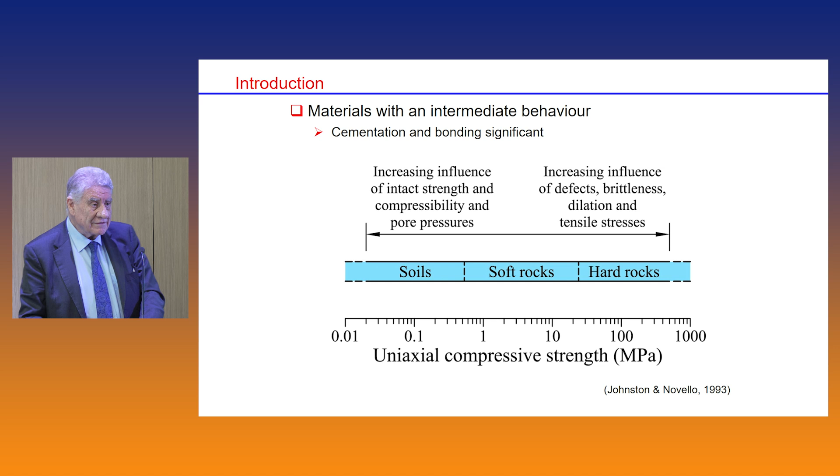Of course, argillaceous materials, rocks made of plastic clays or indurated mud rocks, have been intensely studied in recent decades, mainly because of interest as a possible host medium for deep disposal of high-level radioactive waste, because they have low permeability, significant retardation properties, not much economic value except in special cases, and some sealing capacity. Of course, they are weak rocks, so they require support in excavations. They are more sensitive to chemical changes, and if there is an increase of temperature, overpressures are generated, as we'll see later in this lecture.

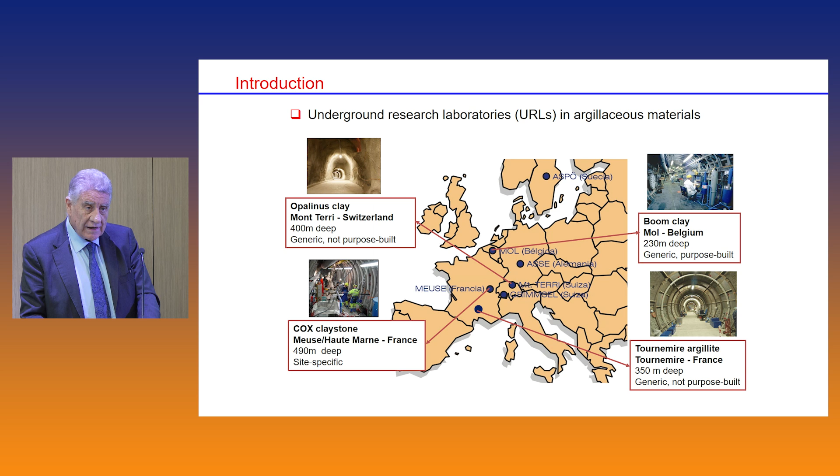Because of this interest, there have been a number of underground labs where excellent research has been done, four of them in Europe: the Opalinus clay in Mont Terri, Switzerland; the Boom clay in Mol, Belgium; the Bure underground lab in Cox Claystone; and the Tournemire lab, among others. Reading for these lectures on this subject, I've collected quite a number of clays that have been intensely studied.

I put them in a geological column. They actually span the full geological column, and I stop at the beginning of the Mesozoic. I also highlighted in blue some of the materials that we will give prominence to in this lecture.

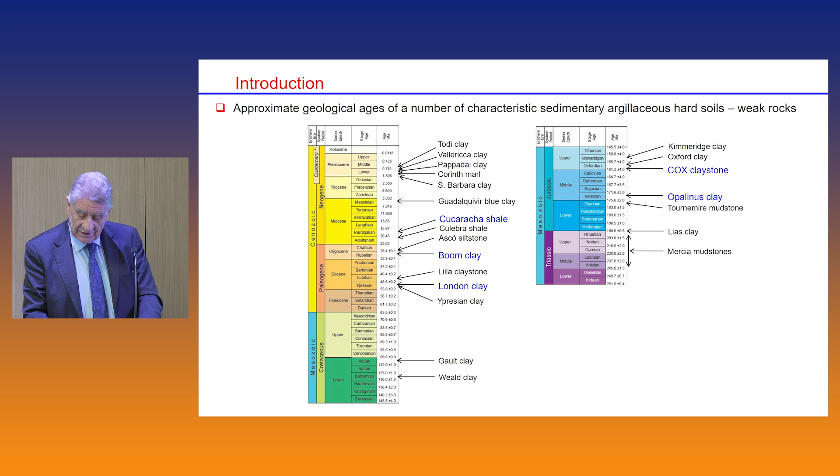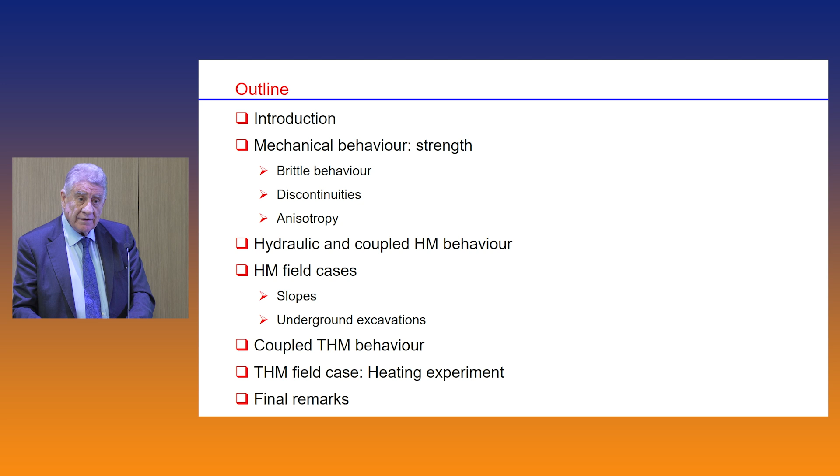After this introduction, we can look at the outline of the lecture. I'm going to talk about mechanical behavior, focusing only on strength, on phenomena like brittleness and anisotropy. A brief mention of hydraulic and coupled hydromechanical behavior, and some field cases regarding either slopes or underground excavations. Then towards the end of the lecture we'll introduce temperature briefly, focusing on one aspect: the overpressures generated by thermal effects in these materials.

So let's start with strength. These materials tend to fail in a brittle manner. I define brittleness as: when we go to the peak, after the peak there is a significant loss of strength. This is a ring shear test on a Spanish clay we studied some time ago, and we can see that as we continue shearing or displacing one piece of the clay over the other, we reach a final minimal and stable strength, which we call residual strength, and that strength can actually be quite low.

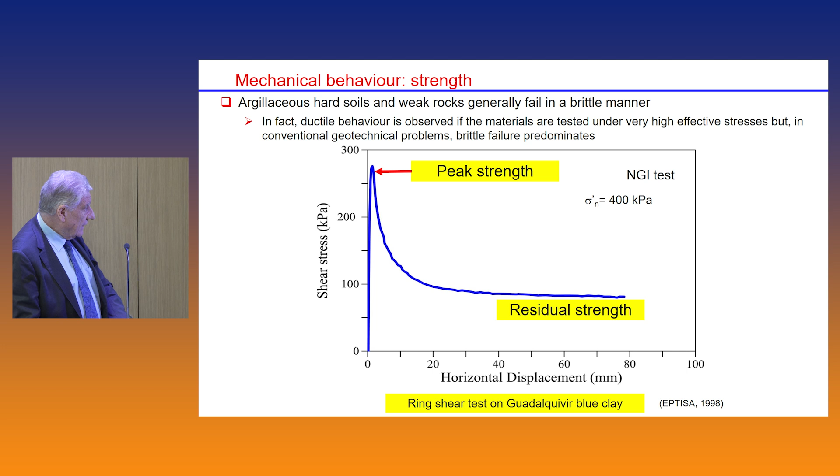But the interesting point is that when we look at the clay in those shear zones, in these localized zones, we find that the clay particles have actually oriented themselves in the direction of the shear displacement. And that explains these very low values of strength, because what we are measuring are frictions between clay minerals.

And this is a typical result. Here we have clay fraction, and here friction coefficient. We see that when the clay fraction is small, the peak and residual strength are actually very similar. They are ductile, because the coarse particles which are in there actually disturb the clay fabric, and they don't allow the clay to align itself and form these very oriented sliding surfaces.

But as the clay fraction increases, we can see that obviously the peak strength reduces, but the residual reduces even more, the distance increases, and brittleness increases, because there is enough clay that this oriented fabric can form and provide this low residual strength. And we obtain that all the time.

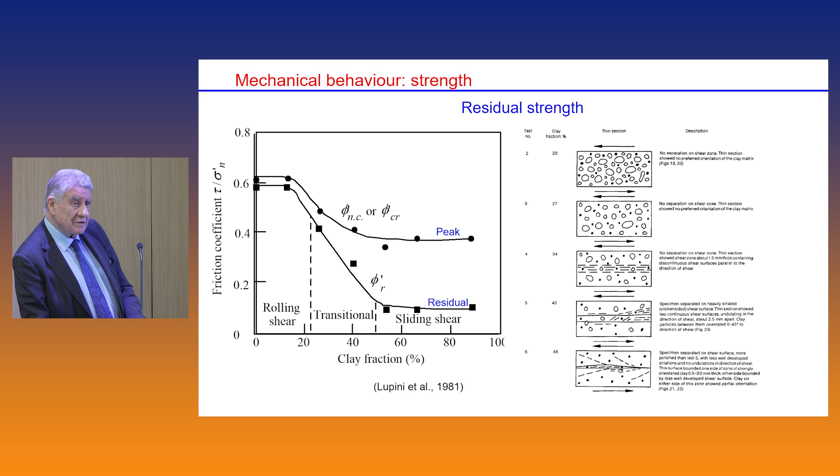These were artificial materials, from a classical paper back in 1981, but more recently, for instance in Opalinus clay, the material in the Mont Terri lab, there are facies which are more clayey, others which are more sandy, so you end up with samples with different amounts of clay. And we obtain the same picture of results.

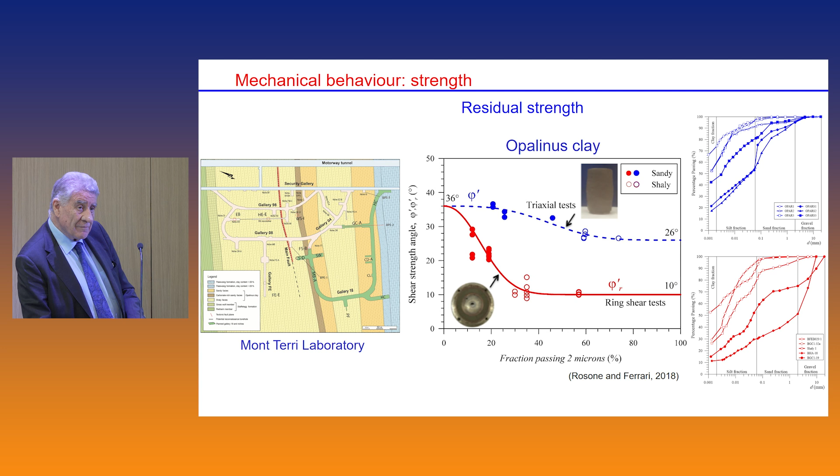This is the peak coming from triaxial test, this is the residual coming from ring shear. This comes from some results from Alessio Ferrari and co-workers, and we can see that we get the same pattern, a large difference, large brittleness, as the clay fraction increases.

To illustrate the really deleterious effects of residual strength, we can just show an example which is the Panama Canal, which actually goes mainly north-south. South is Pacific, north is the Atlantic.

In fact, it was initially a French initiative, which was defeated mainly by yellow fever and health problems. Then at the beginning of the 20th century the US took over. They managed to control the yellow fever, medicine had advanced, and they also abandoned the idea of the sea level canal to make things easier.

And in spite of all that, there were major landslides that we are going to have a look at now. It was opened in 1914, but even so, the major landslides have continued. The last big one was in 1986, which has led to the canal being shut down on at least 26 occasions totally, and other times partially.

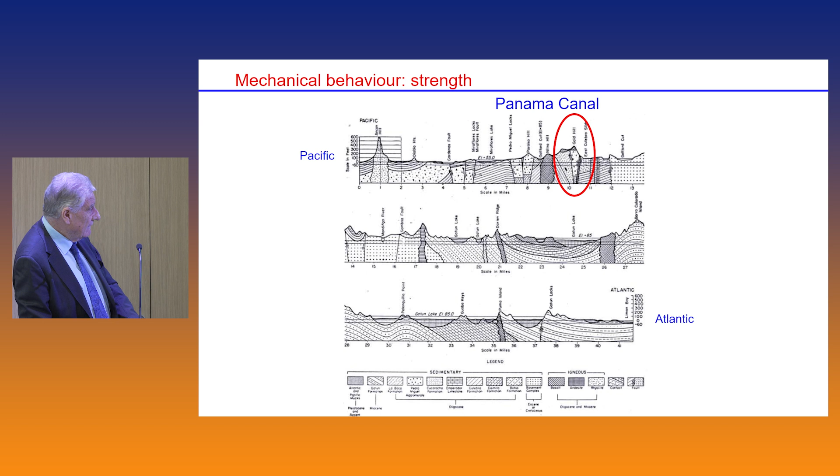You can see here a rare photograph from the Lesseps initiative, in the continental divide, with rather steep slopes. This is the continuation by the US, still rather steep slopes.

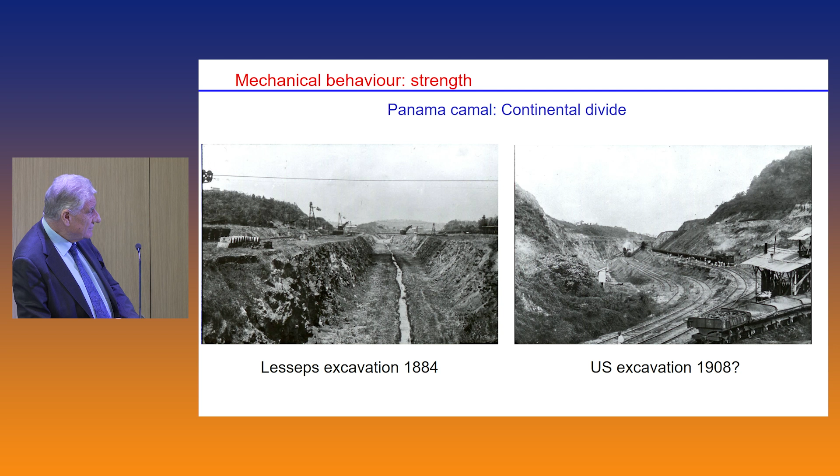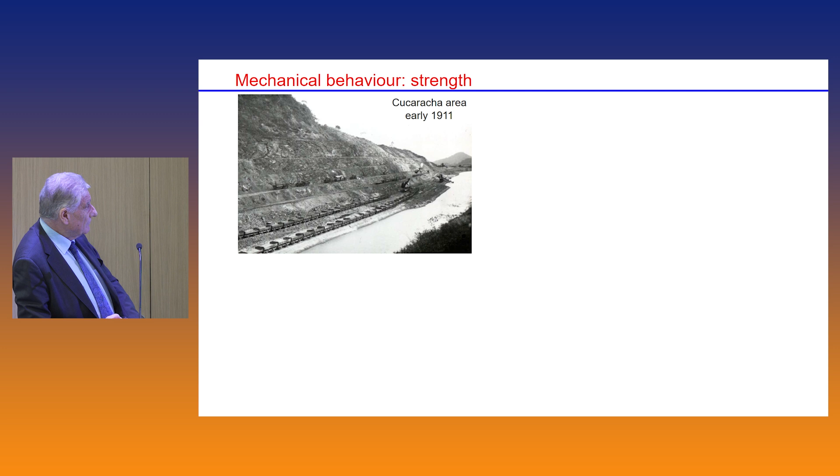Things were going well, but at the end of 1910, and especially from 1911 on, the major landslides started. This is the Cucaracha slide of early 1911, another one in September. There were many - another one in the West Culebra location in 1912, so much so that they ended up flooding the canal and removing material by dredging, because it was more efficient than by terrestrial means and so on.

There were three main areas of failure, all under very similar circumstances: Culebra, West Culebra, and Cucaracha. These are two hills which remain more or less intact.

It was opened, as I said, in 1914, just in time for the First World War, but the slides continued. This is one in 1915. This thing here is the toe of the slide that has appeared in the middle of the canal, so it was coming up here. And that was the last big one, in 1986.

The canal partially open, but quite a lot of dredging going on. There is still dredging going on at present.

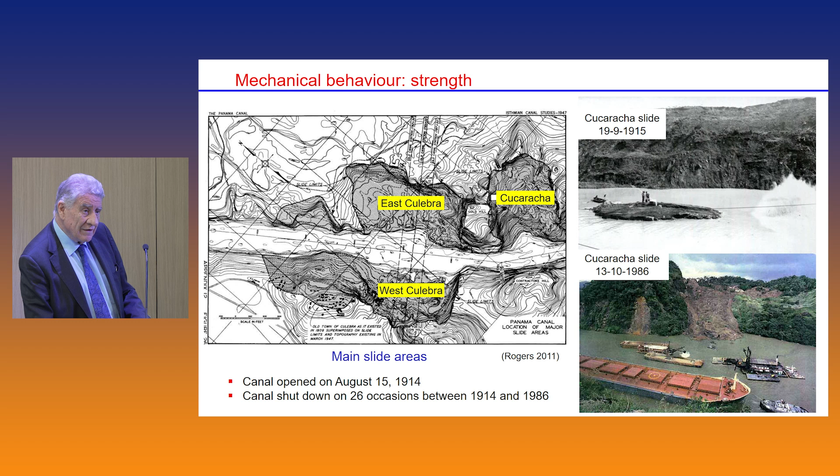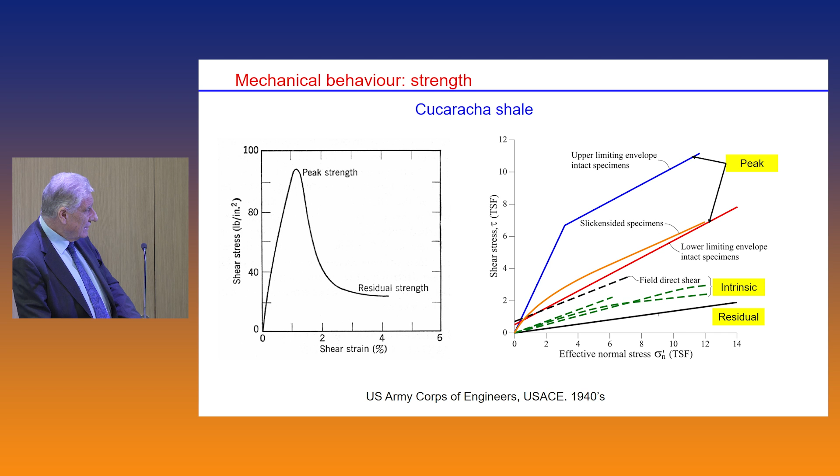And to show the reason, obviously, the culprit was the Cucaracha Shale, which has the classical brittle behavior. This is the peak strength, quite a range because it's natural material.

This is the residual. Now here, in fact, there is also a range of residual, but the average, which I think is a bit low, but it's certainly 7.5 degrees. Perhaps in reality it's a bit larger, but certainly not much larger.

So that's the reason. And just to show the effects of residual strength, this is in red, the design excavation as it was and how it was progressing. But from 1911 on, we had landslides, and in 1969, the surface, which was original there, it's come down to this. It's adapting to the residual strength.

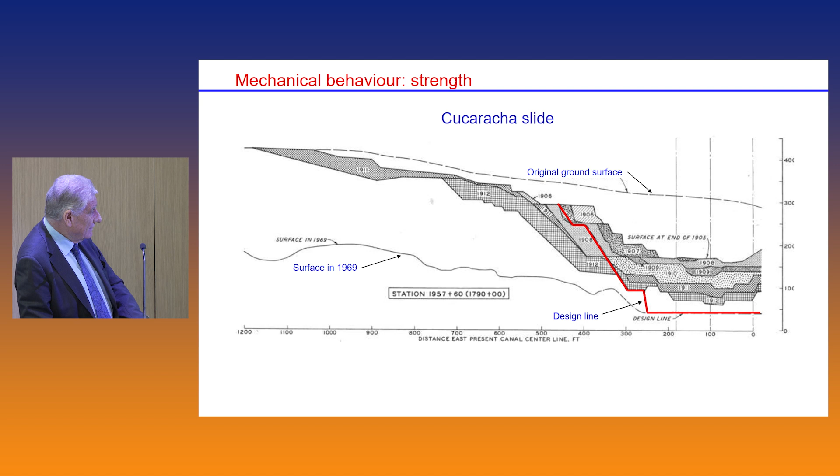If you do a cruise in the Panama Canal, which is possible, and when people go by, they look at this. This is the Gold Hill, this is Contractors Hill. But for us geotechnical engineers, the interesting part is here and here.

These are the East Culebra, West Culebra slides. You can see that the bank has practically disappeared, and it has finished more or less sliding because it has adopted a friction angle which is very close to the residual.

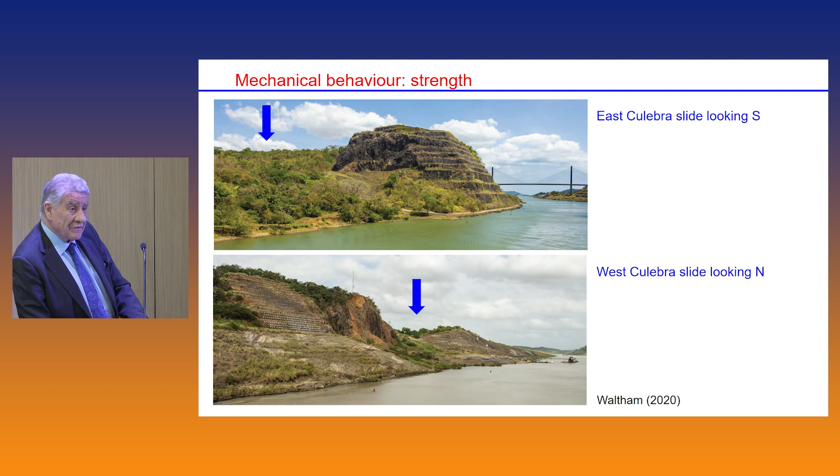Okay, that's not the only feature of the brittleness and strength of these materials. There's another one that's been frequently observed, that after reaching peak, quite often you get a very strong loss of strength with very little displacement, then something which looks stable.

These are triaxial tests, this is not the residual, you don't get to residual in the triaxial, but it's an interesting point, and it was baptized as post-rupture strength, I think by Burland in his Rankine lecture, and that name has actually stuck, so we talk about post-rupture strength.

This is usually attributed to the loss of bonding, which doesn't require much displacement, especially if the bondings are not very strong. And the result is that you lose most of the cohesion, if not all, and you lose very little friction. Another observation, which we don't know very well how to interpret, is that this post-rupture strength...

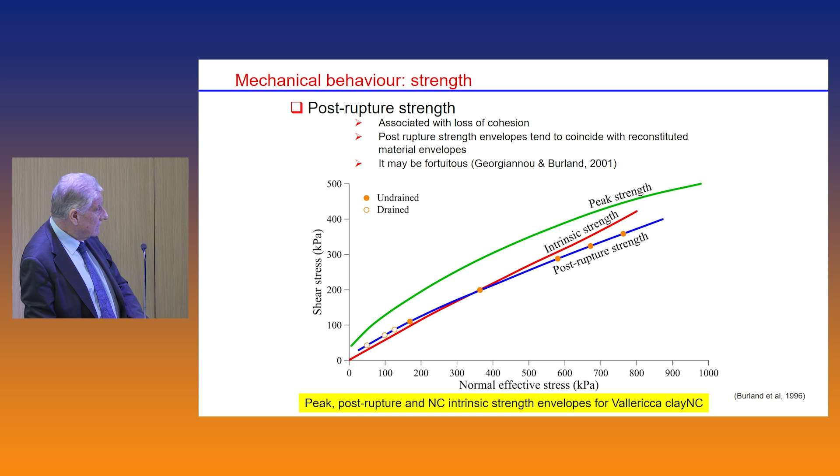...and intrinsic strength would be the strength of a reconstituted material. They're usually quite close, which is perhaps not surprising because there is not much bonding present in a reconstituted soil. And again, this behavior is confirmed many times.

I just got a paper from my friend Michael Bardanis, who's been doing drained direct shear tests recently on a number of Greek marls. For instance, on the left, we have Attica marl, on the right-hand side, the Deverni marl, and you can see very clearly this...

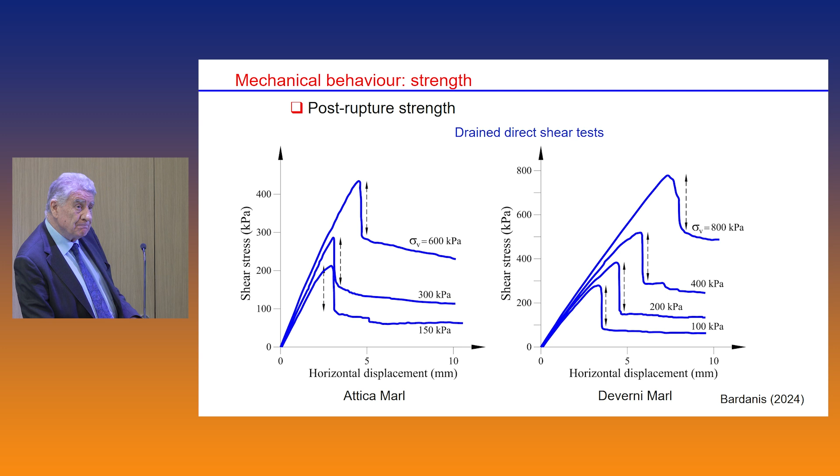...sudden drop of strength down to the post-rupture strength. And if we put together the failure envelopes, we can see what we were just mentioning here.

This is the peak, the post-rupture. It has actually lost most of the cohesion, but the strength, the friction angle, is nearly the same. The same for the Deverni marl.

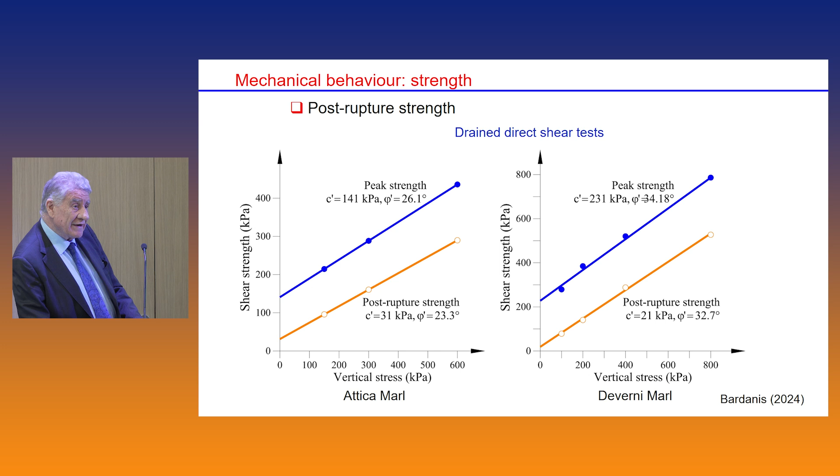So we can bring all this together in a kind of conceptual framework which goes back quite a long time, and the first time I saw it explicitly stated was by Simpson in 1979, that we have two stages in this reduction of strength down to the residual.

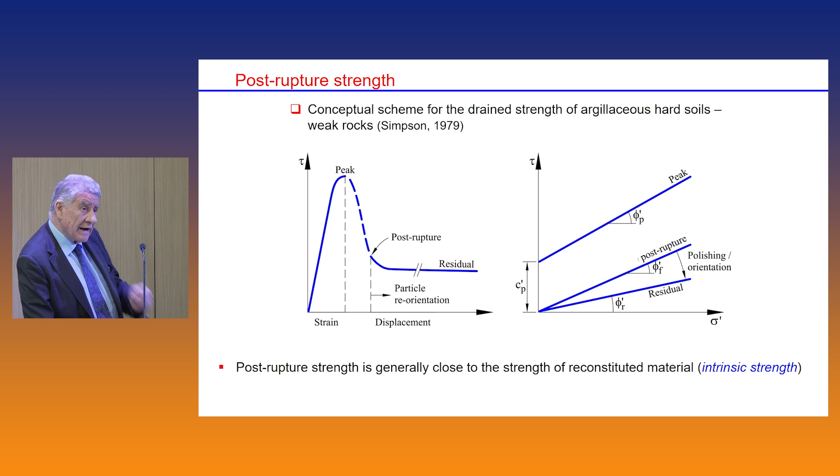The first one due to the loss of bonding, in which we lose most of the cohesion but very little friction. And then the second stage is due to particle reorientation, which accounts for this very low friction angle. Cohesion is not lost in the first stage, so the little that is remaining gets lost also at this stage.

This also provides a framework to discuss the strength of discontinuities. This is London clay, which will appear a few times because it's a very well-studied clay. We can see there are joints in London clay, like any rock, forming families oriented the same way. But they also have fissures, which are more randomly oriented and shorter. If we look at the strength of both joints and fissures, we end up with something very close to the post-rupture strength, and therefore also the intrinsic strength.

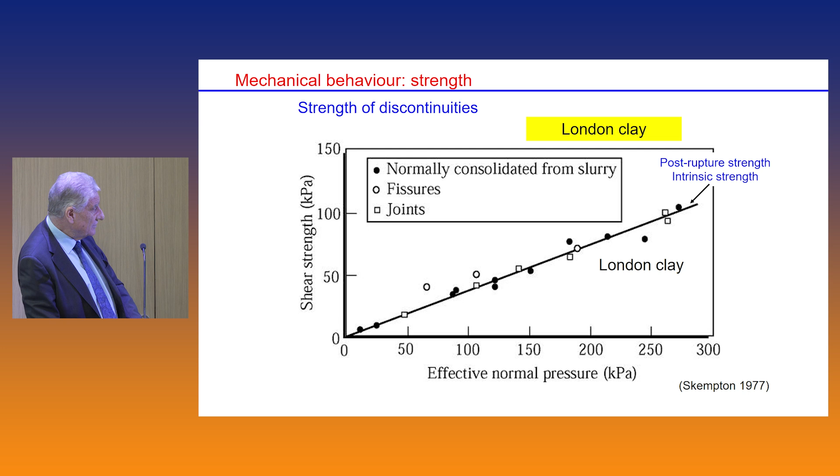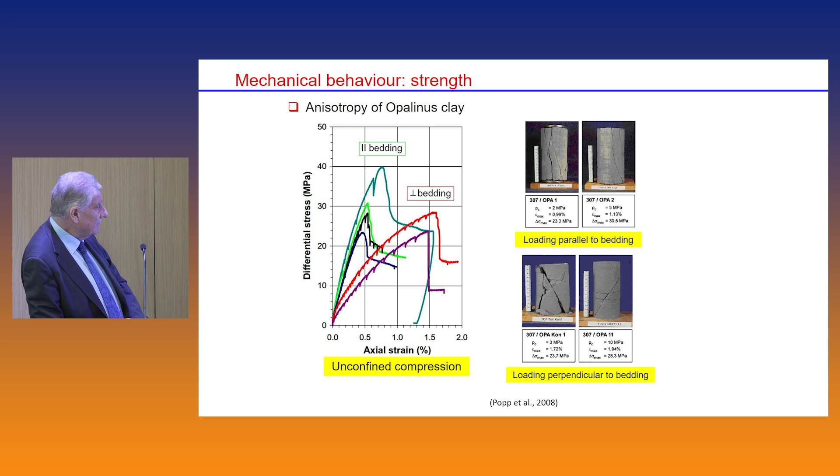Finally, a couple of words about anisotropy, which we'll see later is actually significant. This is Opalinus clay from Mont Terri. You can see that when tested parallel to bedding, we have a stronger and stiffer material than when we load it perpendicular to bedding. Similar results are seen in London clay tested in the hollow cylinder apparatus, showing the variation of strength with the orientation of loading. This is perpendicular to bedding, with a minimum around 45 degrees, but parallel to bedding, like Opalinus clay, it has a higher strength.

Because you can measure quite a few things here, you can identify two different sources of this anisotropy. One is the variation of the friction angle with orientation, and the other is the change in direction of the effective stress path. It's the combination of these two that results in this anisotropy of the drained shear strength.

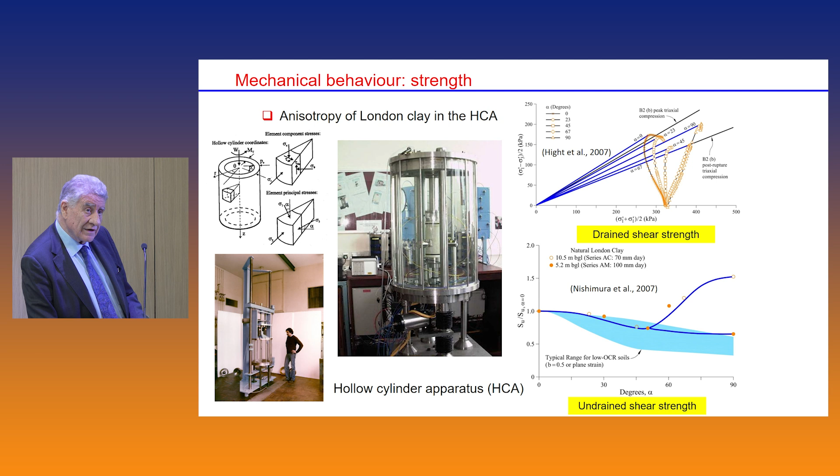To summarize the lecture so far: these materials tend to fail in a brittle manner, and this reduction of strength often comes in two stages—one associated with the loss of bonding, where we lose most or all of the cohesion, and the second associated with the reorientation of clay particles, where friction can achieve very low values. The strength of discontinuities seems to fit this same idea. Finally, anisotropy, which I just mentioned, is in some cases a key feature to explain behavior.

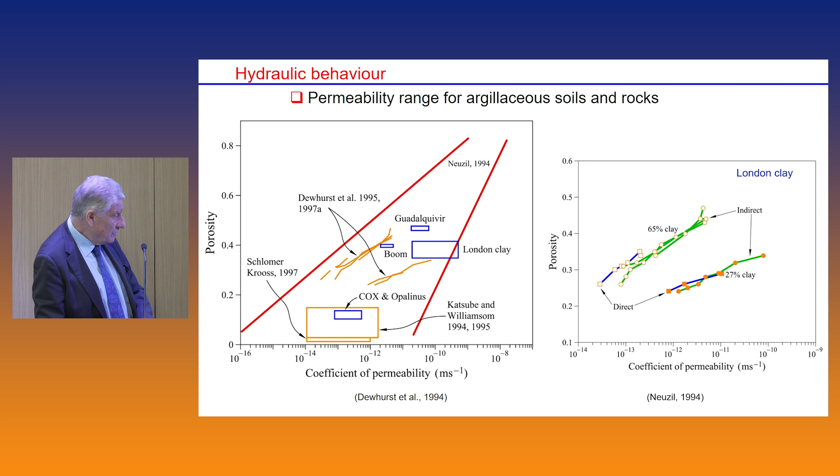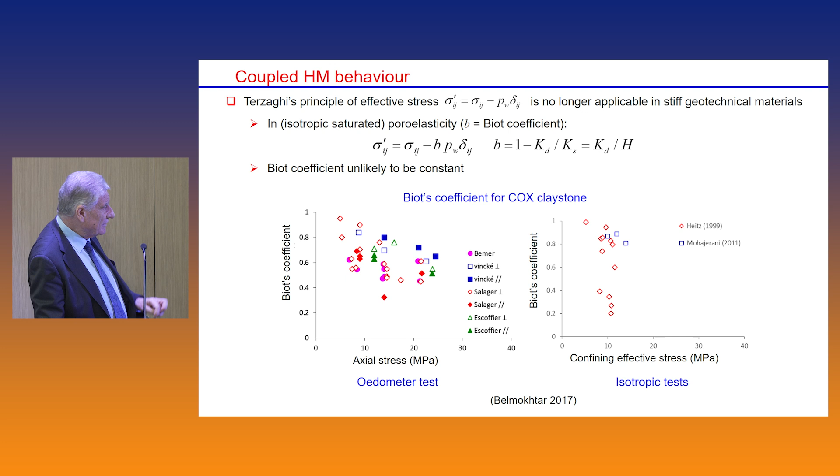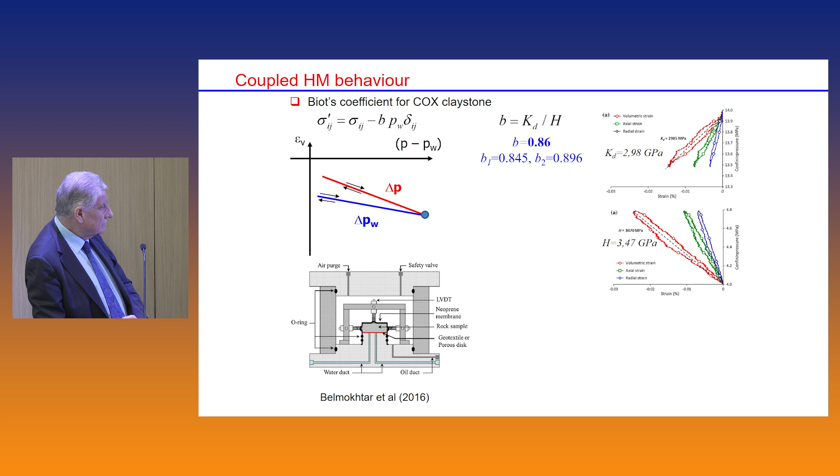There's been quite a bit of clarification on this from work done at CERMES, by the group of Pierre Delage and Jean Talandier, who tried to carefully measure the Biot coefficient for Cox clay stone. They did it in the traditional way, applying a cycle of mean stress and a cycle of pore water pressure—if Terzaghi's principle held, these should give the same result, but they don't. In this particular case, they found values around 0.86.

But you can do it independently, and they did, using unjacketed tests that allow you to compute the stiffness, the volumetric stiffness of the solid phase, and they obtain a very similar result, which gives confidence that this is probably quite right. They did more tests and ended up in this range between 0.85 and 0.90.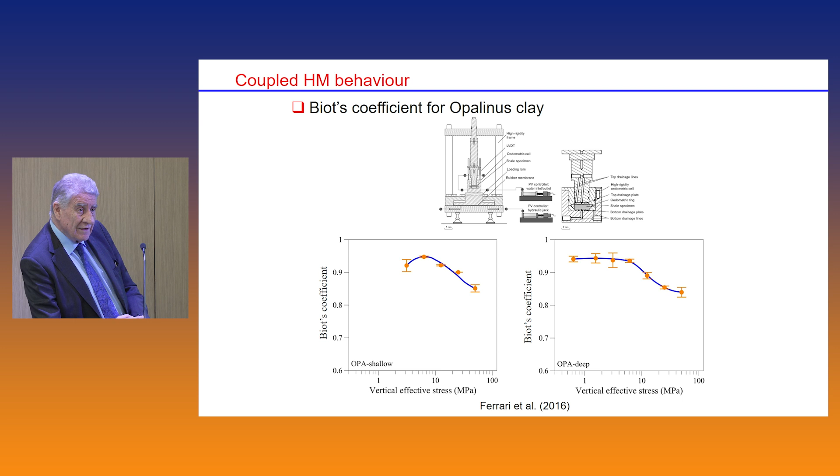Also, more or less at the same time, Opalinus clays were being tested in a similar way, and they end up with values around 0.9. So it seems that for these stiff clay stones, this coupling Biot coefficient is not 1, but it's not very far from 1, and it's likely that when we reach failure, it's gone up to a value of 1.

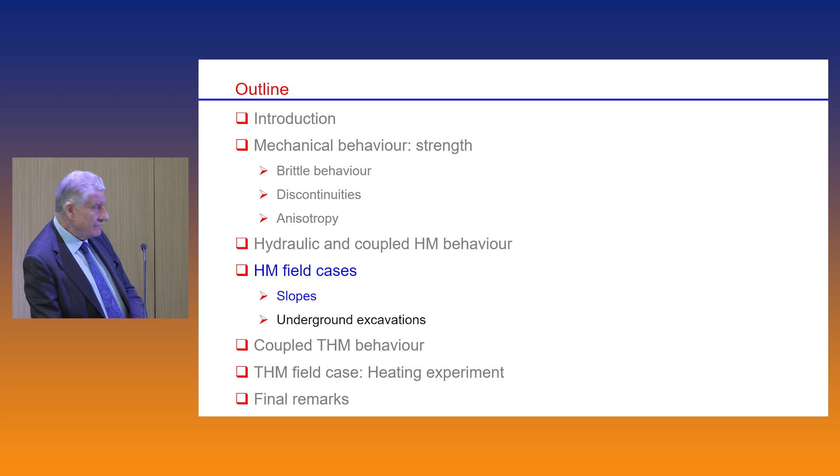I'm not going to say any more here, and we are going to look at two cases, quite different. The first one is slopes in London clay. I'm bringing this here, although it's rather a mature subject, because it has been extremely influential to develop the present ideas about progressive failure, brittleness, and so on.

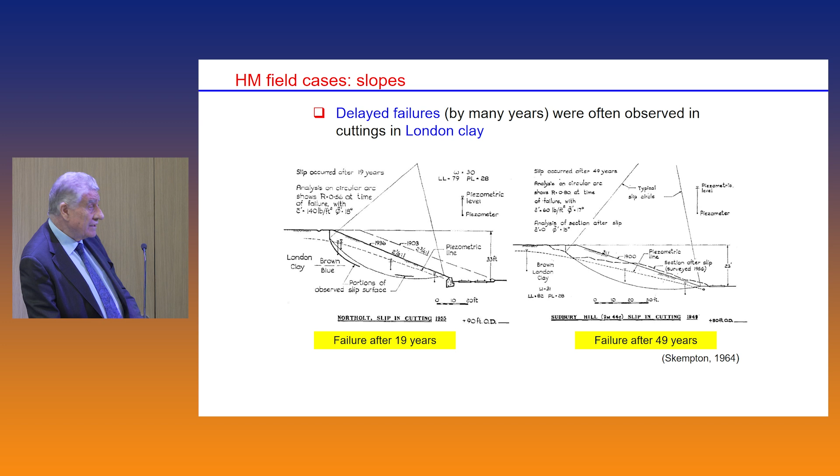One thing that was puzzling the geotechnical community for some time is that the cuts in London clay failed. Many studies failed, but interestingly they were failing many years after they had been excavated. For instance, these are two examples coming from Skempton's Rankine lecture, in which this one on the left, the Northolt one, failed after nearly 20 years, and this one in Sudbury Hill failed after nearly 50 years. And so that created a puzzle.

A puzzle also compounded by the fact that when you back calculated the strength explaining the failure in a number of places, you could get a failure envelope which turned out to be very close to the intrinsic or the strength of the reconstituted material, which we know now is similar to that of the post-rupture. Very different from the peak, very different from the residual, somewhere in the middle.

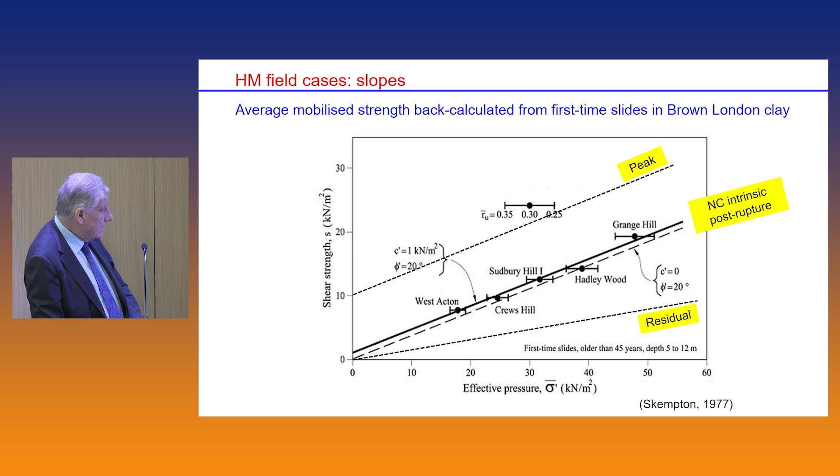Also, interestingly, when the back analysis was performed on reactivated landslides, they found that the residual strength was operational there, around 12 degrees in the case of London clay, which means that once you got to residual, there is no way that the former strength can be recovered. That's not strange, because it's difficult to envisage how this oriented fabric could actually be rearranged into a different pattern.

So that was quite clear, but the first-time slides were creating a puzzle. Well, if we go briefly back to the Panama Canal, the same picture arises. These are the values of first slides in the Culebra slide, very close to the reconstituted material. When they were reactivated in 1990 and 2001, what they were showing obviously was residual strength.

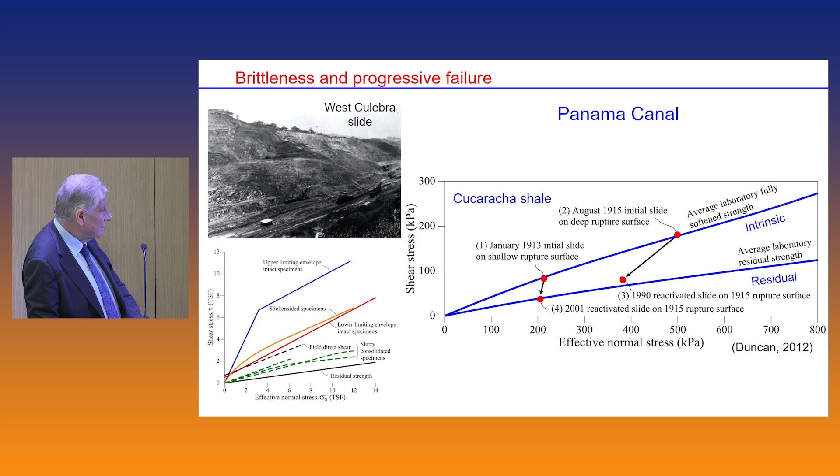So, and initially that gave rise to some theories which later on were proved wrong. The initial theory, actually supported by very illustrious people, was that there was a progressive loss of strength affecting mainly the cohesion due to water infiltration, softening of the material. That's how the term fully softened appeared. They reached something called a fully softened strength, and then it fell. Obviously, after failure, it went to residual, and during this the friction angle was actually reduced.

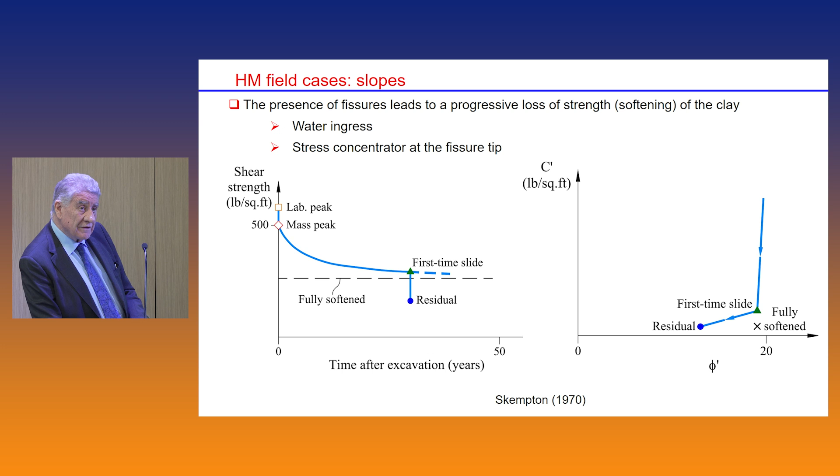But doubts on these mechanisms were first cast by the observations of Peter Vaughan and Jim Walbancke, who measured pore pressures in cuts in London clay that had not failed, and they found that the pore pressures they were measuring were actually quite far from equilibrium. And in fact, the times required to reach equilibrium were on the same order of magnitude as the times that were being recorded for failure after the excavation.

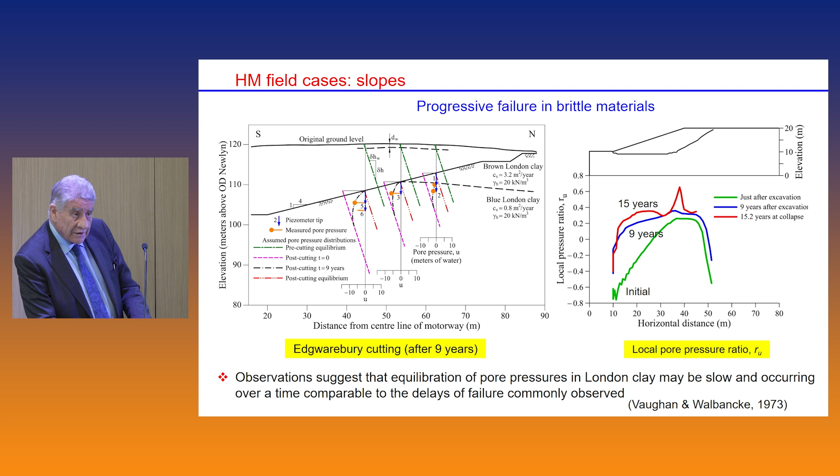So they say that the observation suggests that the equilibration of pore pressures in London clay may be slow and occurring over a time comparable to the delays of failure commonly observed. In fact, when you put together those back analyses with the observations and the back-analyzed pore pressures from the failures, they came out on a very nice single curve. That's taken from the paper.

These preliminary observations—they are not preliminary anymore because they've been confirmed—suggest that failure of cuts in London clay may be delayed primarily by the rate of pore pressure equilibration. If this is so, and that's the important statement, it's unnecessary to presume a significant drop in drained strength with time.

So you didn't have to postulate an additional mechanism out of nowhere. Of course, why...

The reason why the back-analyzed strength was somewhere between peak and residual comes from the realization that brittle behavior leads to progressive failure. In a progressive failure along a landslide, there will be some parts which are residual, some parts which are at peak, sometimes somewhere in the middle. So what you calculate is not the strength of the material, it's an average strength. It's wrong to think of a single strength.

And all this could be actually demonstrated using simple finite element analysis without any assumption, just putting in the brittle behavior of the material and just allowing the pore pressures to recuperate according to the permeability of the material. Nothing else. And that was done by Potts.

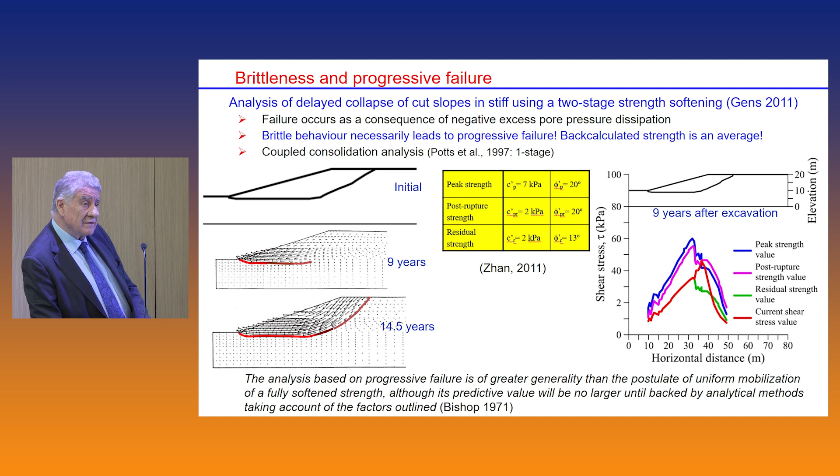This is the evolution of the peak, post-peak, residual strength compared to the stresses which are applied, and you can see that there is a variety of strength operating at any time.

So that creates the question, not easy to answer: what is the operational strength? In a sense, what strength should I use for design? I don't think we can give a single criterion, for the reason that this average must depend on the geometry of the problem, on the scale, on the brittleness, on the rate of degradation of the brittleness. All these factors must play a role. So it's unlikely that a single size fits all.

Anyway, if we take this residual factor, which was defined by Skempton, in terms of averages, where are we in this back-calculated strength between peak and residual? On average, obviously, that's the only thing you can do. We find that in the slopes, it's between 0.4 and 0.6.

In Carsington Dam, that was a very important case history because it cleared up a lot of misunderstandings about progressive failure - it's between 0.4 and 0.5. The Aznalcóllar Dam, a tailings dam that failed through a foundation failure, we found around 0.4. So it seems to be clustered between 0.4 and 0.5.

But for the reason I was saying before, I think it would be wrong to actually use that as a general rule. In fact, that was already said by Bishop, even before any of this. He said in '71, it's unwise to generalize on the basis of slopes where the geometry, scales, and soil properties vary only over a limited range, until the relative importance of these variables has been established.

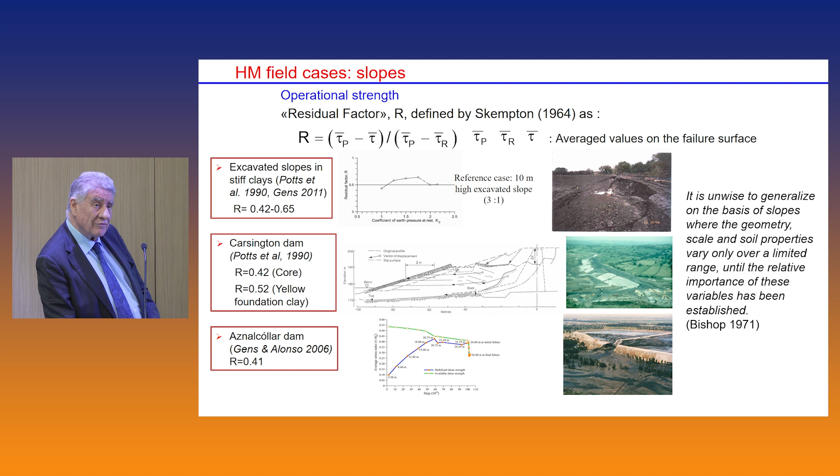And actually he was saying, until we have an efficient analytical method to clear this up, it will be difficult to make any statement. Well, now we have this analytical method, we can do finite elements or other numerical methods, but I think the conclusion up to now is that it would be wrong to take those cases as a guide for other very different situations.

So if I summarize this part: it has been demonstrated that pore pressure equilibration controls the time of failure in this type of problem. And if we have brittle behavior, progressive failure will occur, because we are always in situations of non-uniform stresses and strains in the field. So because the operational strength, the back-calculation strength, the design strength if you like, depends on so many factors, it's unlikely that a general criterion to select the value for design will ever be found.

What has really been abandoned is the concept of fully softened - there is no such thing. The fact that the post-rupture strength seems to explain many of these failures, I think, may be a bit fortuitous. Of course, numerical analysis provides an attractive way to tackle this problem, but it is complex, not as straightforward, so I think we are still a long way from this becoming a routine design tool.

Let me go to underground excavations. Here we are not going to residual because the excavations are usually supported, so they don't go very far. I'm going to talk about excavations in the Bure underground lab, and here I take this opportunity to thank Andra, because for the support, not only for the work I'm going to present, but in many other projects.

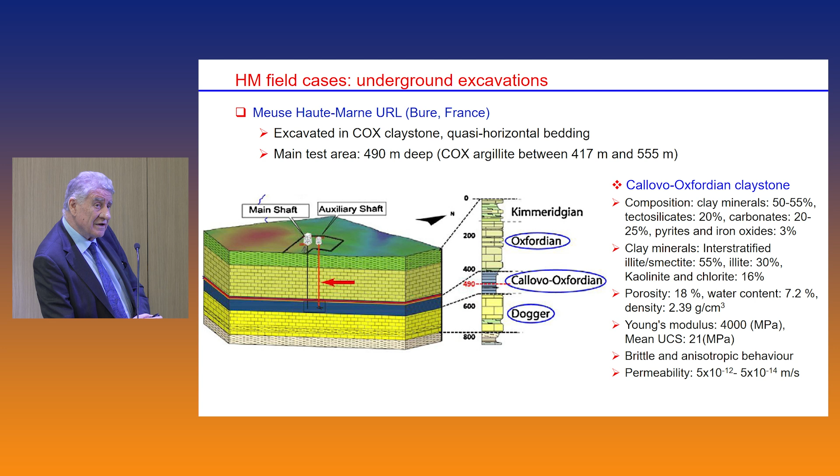I'm sure all of you are quite aware of this laboratory excavated in Cox, about 500 meters below the surface. I'm going to spare myself talking about the properties of this material, but obviously strength, the material is brittle, and strength and stiffness are anisotropic, like in most materials anyway.

This is the layout of the lab. What is important here is the in situ stresses which occur in the lab. First of all, there is a vertical stress which is more or less equivalent to overburden. And the horizontal stresses are not isotropic. There is a major one, which is about 1.3 the vertical stress, and a minor one, oriented at 90 degrees, which is quite similar value to the vertical one. Very nicely, Andra excavates the tunnels, the galleries, in the direction of the major and minor principal stresses horizontally, which actually helps with interpretation.

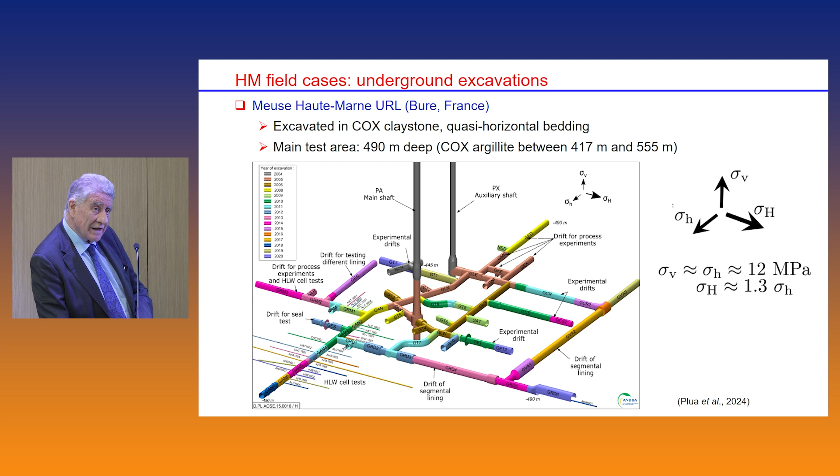Obviously, if you are interested in radioactive waste, you are interested in the EDZ, and there has been excellent comprehensive work in characterizing that EDZ, which is not the place to describe here. But the summary is that if you excavate parallel to the minor principal stress, where we have a horizontal stress larger than the vertical, the EDZ develops mainly in the vertical direction, very little horizontal. Also, the convergence in the vertical direction is much larger than horizontal.

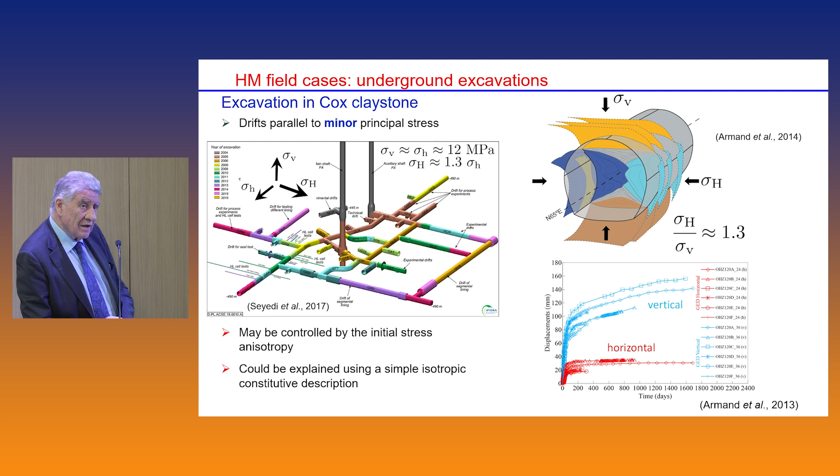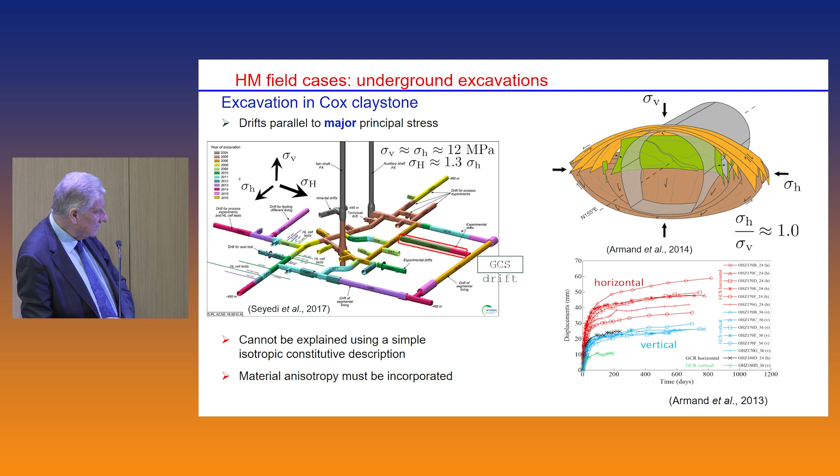If we now take excavation in the perpendicular direction, this is now parallel to the major principal stress. So in a cross section we have something which is more or less isotropic in terms of in situ stresses. But as you can see, the development of the EDZ, the excavation damage zone, is certainly not isotropic. It develops a lot horizontally, only a little vertically. And again, now we have horizontal convergence larger than vertical.

Okay, so we are going to try to model the development of this EDZ. This is work that was done especially by Manica.

This is a rather simplistic constitutive model, but with a number of added features which make it quite useful. We have this hyperbolic Mohr-Coulomb surface as the main yield surface, but hardening and softening is established by the variation of the friction angle, cohesion, asymptotic cohesion, and tensile strength. Obviously, the degradation of cohesion is much faster than the friction angle, to keep this two-stage brittleness model we were seeing before. Also, the strength is anisotropic, and this is the one we are going to use in the lecture I'm going to show. There is a minimum around 45 degrees, a maximum when loaded parallel to the bedding.

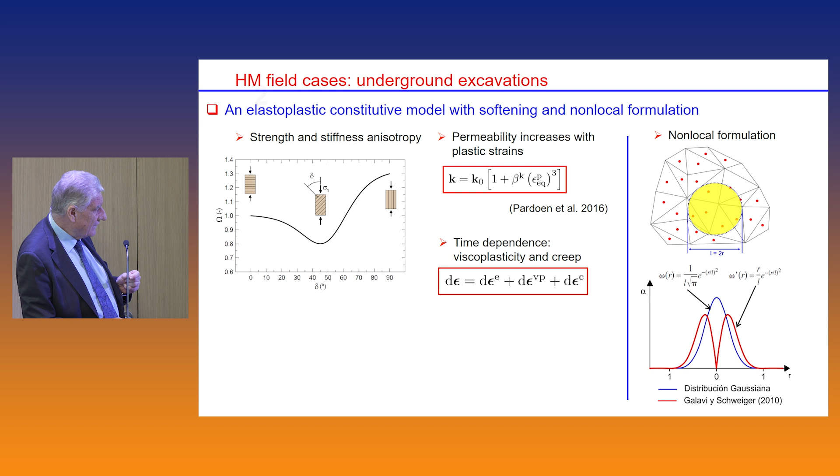There is a variation of permeability with damage, to be precise with plastic strains, and we take this cubic form that was introduced by the people at Liège, with some time dependence, which is not going to figure today. Because we are into softening, we need some regularization technique, and what we use is a non-local formulation in which what happens in a Gauss point depends on what's happening in the Gauss points in the neighborhood. This is the weighing function that we use, this red one, due to Galavi and Schweiger.

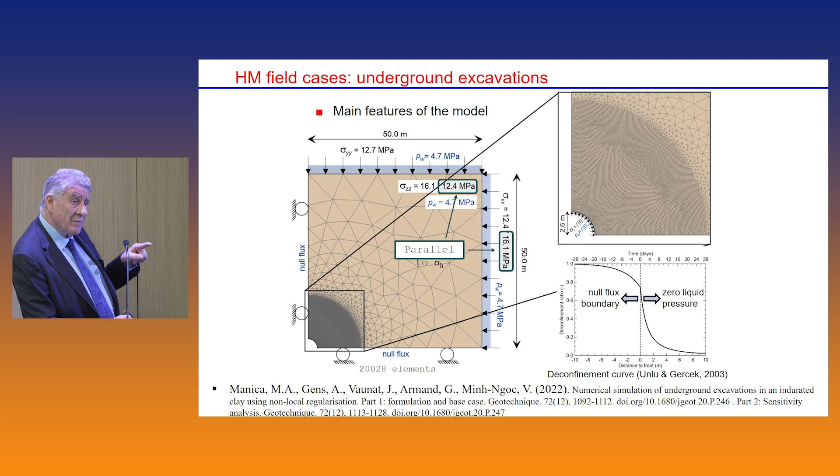So putting all this together, we try to analyze in two dimensions, in which excavation is approximated by this deconfinement curve. The details are in a couple of Géotechnique papers by Manica et al. We can see that it's a very fine mesh. You need fine meshes in non-local formulations because you need a number of Gauss points around the Gauss point you are considering, so you need a fine mesh for that.

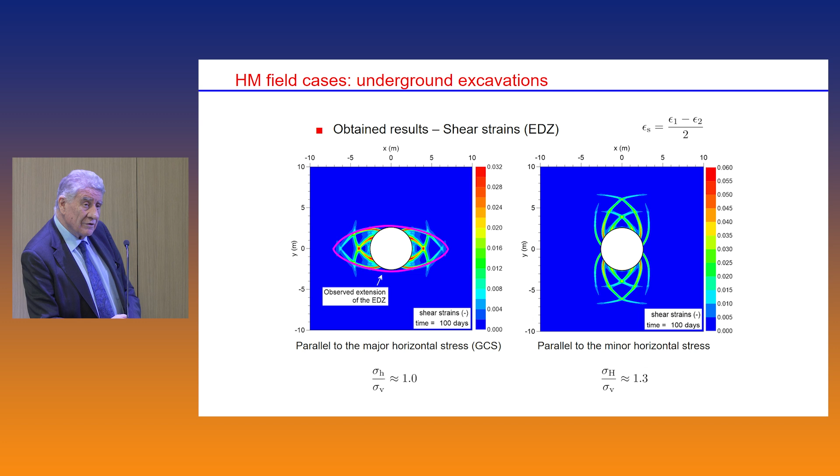Now we can see the results in terms of EDZ development. Here on the left is the excavation parallel to the major principal stress, so the cross-section in situ stresses are actually isotropic, and we can see how the EDZ develops with these localized zones, ending up with a configuration quite similar to the one observed before. If we move now to the right, excavating in the perpendicular direction, now we have a horizontal stress higher than the vertical, and when we do the calculations, you can see that it develops mainly in the vertical direction, again quite similar to the observations.

There is more benefit from this analysis. For instance, looking at the flow of water: it gets concentrated in localized zones just because of this increase of permeability with plastic strains. These localized zones concentrate the plastic strains, and that's where the flow occurs, meaning the region around the opening, at least the horizontal one, is relatively well drained due to these localized zones. That explains some observations.

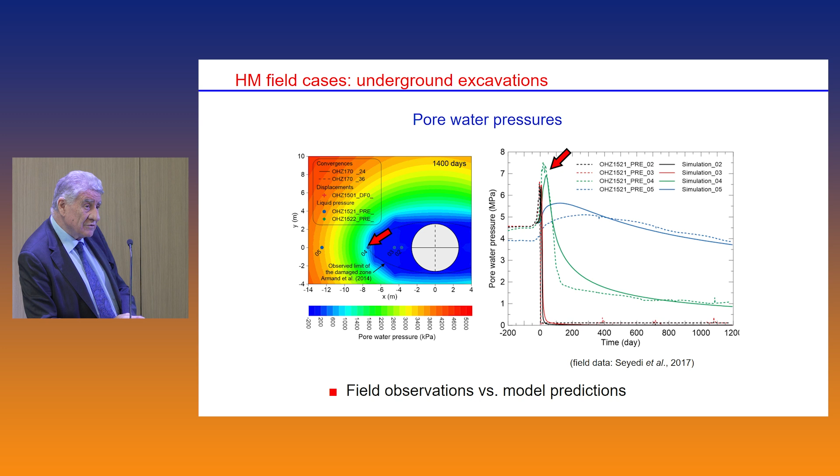Here in dashed lines are observations of pore pressure in a horizontal profile at increasing distances from the opening. Contrary to what you'd get in an elastic analysis, where maximum pore pressure is generated close to the opening, here the maximum is towards the edge of the EDZ, because that part is relatively well drained. The calculations show the peak a bit lower than observed, and also a reduction with time, which seems to fit reasonably well with observations.

Pore pressures were measured at 6 months, 1 year, 2 years, 3 years. These are the results at different times, and again, the model seems able to capture this variation of pore pressure with time.

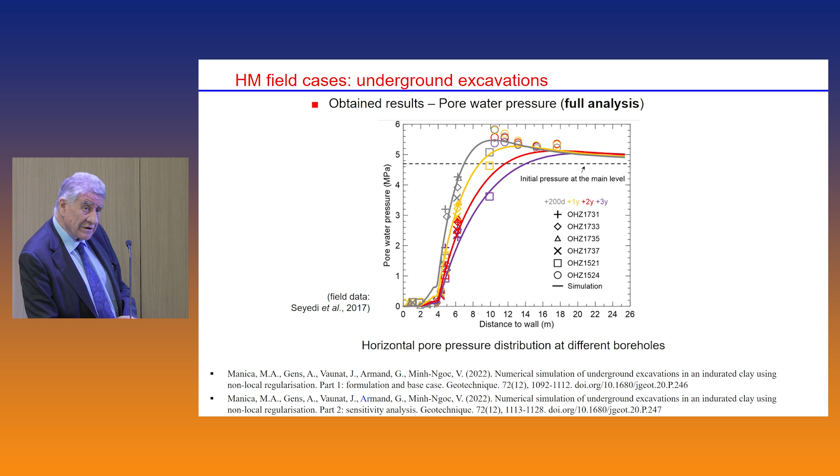We can also check different distributions of strength anisotropy and see what results you get. When parallel to the major principal stresses, using distribution number 1, similar to what I showed before, you get the right result, but not so much with other distributions — evidence pointing towards a certain type of strength distribution. When we go to the non-isotropic stress state, this stress state dominates, so for all three you still get quite a large vertical development of the EDZ, similar to observations.

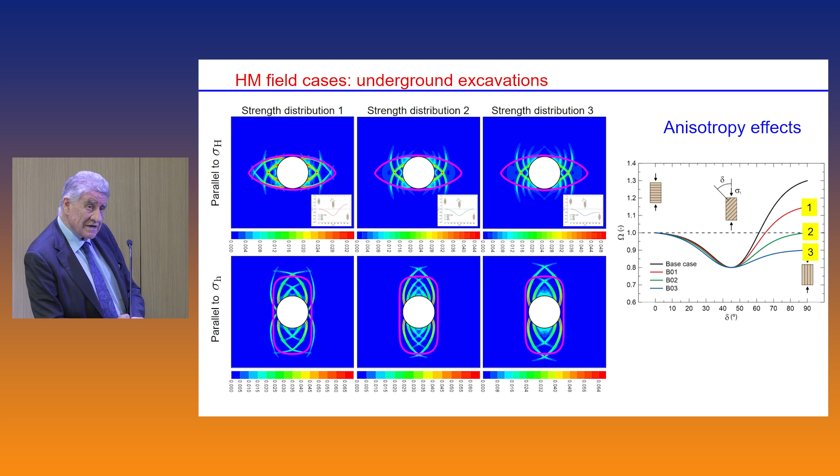So, to summarize: brittle behavior leads to localized fractures in the rock adjacent to the excavation, which constitute a component of the EDZ, and that configuration is controlled by brittleness, strength anisotropy, and in situ stresses. The importance of each factor differs depending on orientation. Water flow and pore pressure evolution are strongly affected by the presence of these localized zones, and it seems that with the formulation used, we get a reasonable representation using this numerical model.

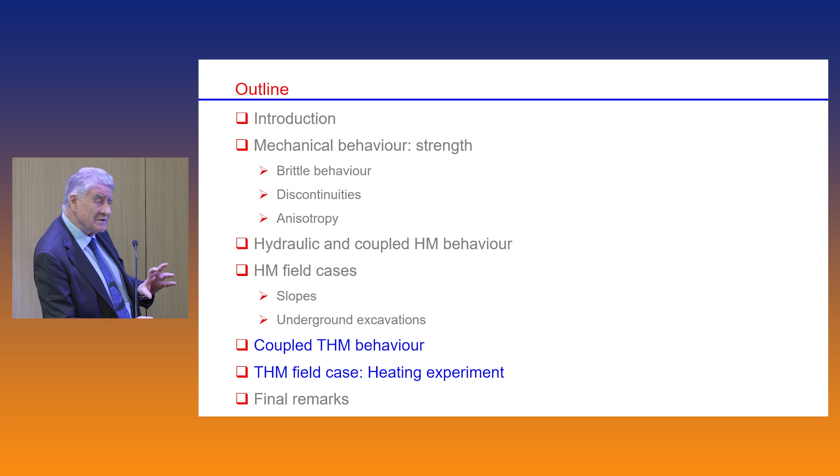Let me finish quickly by saying a few things about when we introduce temperature. There are many aspects, and the behavior actually depends on temperature — we have modified the models to take that into account. But here I'm going to refer only to the overpressures that appear in this type of rock when we increase the temperature, because it's a very interesting and showy phenomenon.

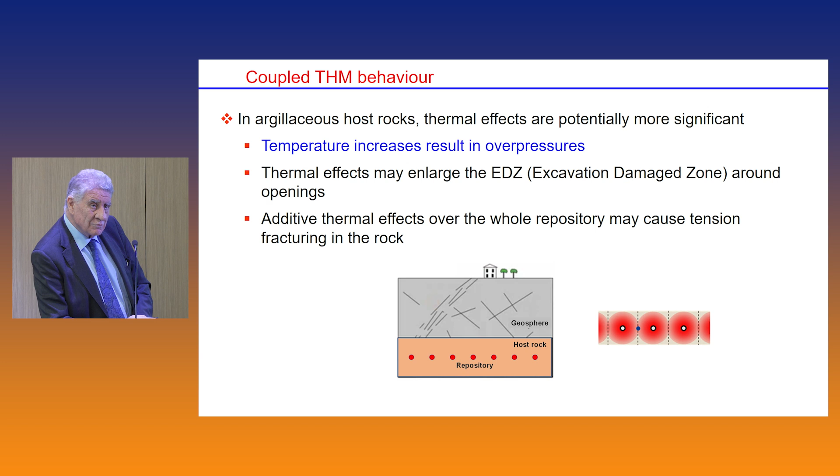There are consequences in the sense that thermal effects may enlarge or affect the EDZ, and also, if you add all these thermal effects from a whole repository placed very close together, they could lead to some kind of tensile failure.

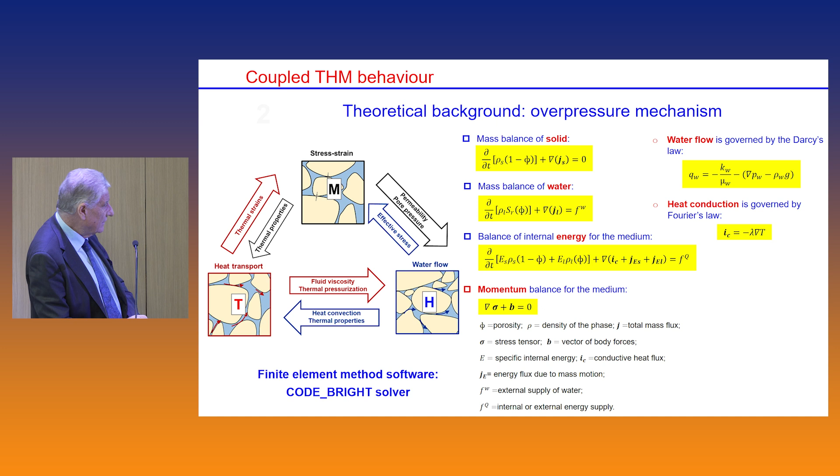The only way to approach this problem is through a coupled formulation, involving solving the mass balance of solid, water, energy, and momentum or equilibrium, introducing Fourier's law for heat conduction, the only relevant heat transport phenomenon. If we take the mass balance of water and introduce the various dependencies, we end up with an expression that lets us see what phenomena result in this overpressure. The first and main driving force is the differential thermal expansion of the liquid and solid phases.

The next two are the variation of the volume of these phases, not due to temperature, but other things like solid pressure and pore pressure. The fourth is the deformation of the whole skeleton, which also plays an important role. And finally, the fifth is the water coming in or out of this representative elementary volume, because the permeability is low, but it's not zero.

All this, the interplay of all these phenomena is what gives you the pore pressure. If you simplify the problem and assume undrained conditions, so there is no water going in and out, Vu, Armand and Plua have very nicely derived the equation for the coefficient that relates the increase of temperature to the increase of pore water pressure, and we can see here that the usual culprits appear.

This is the differential thermal expansion of the phases, the stiffness of the material, the compressibility, the volumetric stiffness of the solid phase and the water phase. You obviously have to check your code, because sometimes there are subtle things in codes that don't consider all these things, so you need to verify that your code is actually giving you the right result.

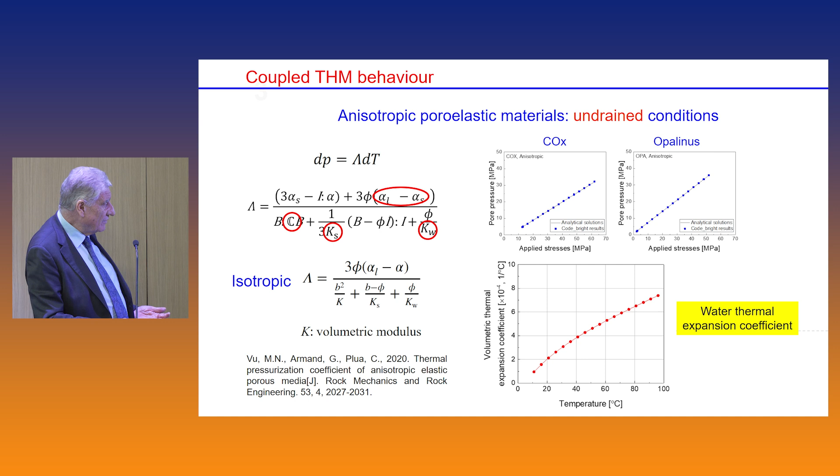What is important is, because the thermal expansion of the water is the driving force in all this, to use the real value, which is actually variable with temperature. It's 0 at 4 degrees C, when there is a maximum of density, and you can see that from this 0 value it increases significantly as you move up with the temperature.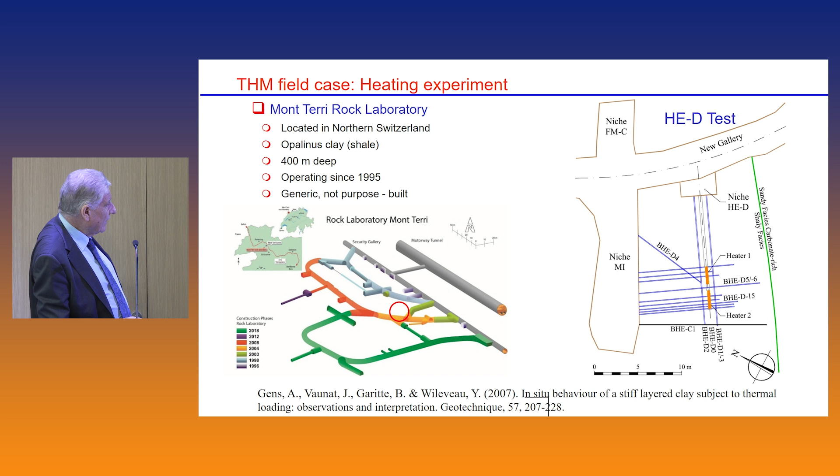This is the excavation of the niche. You can see the Opalinus clay. This is the drilling of the borehole. This is the installation of the heater.

And what we are going to show are some results of a 3D analysis. Why 3D? Because here the bedding planes are at more or less 45 degrees, and we want to introduce the anisotropy of stiffness, thermal conductivity, in situ stresses, and so on. So you need the 3D.

Let's look at some observations first to give an idea of what's happening. This is the central borehole, the heating borehole. We are measuring 1 meter distance in the direction of the bedding plane. You can see the temperature increases, then the heater power is increased, and it increases more, and so on.

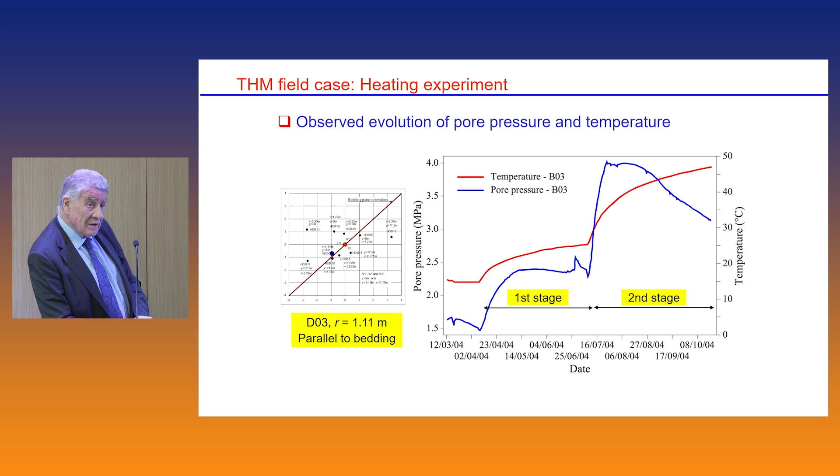And this is the reaction of the pore pressure, which you can see is strong. It reaches here 4 megapascals, so it's not trivial. 4 megapascals is approximately what is reckoned, it's difficult to measure, but it's reckoned to be the minimum principal stress in Mont Terri. But it's also interesting that the temperature keeps rising, while the pore pressure reaches a maximum and then actually drops because of dissipation. The permeability is low, but it's not zero.

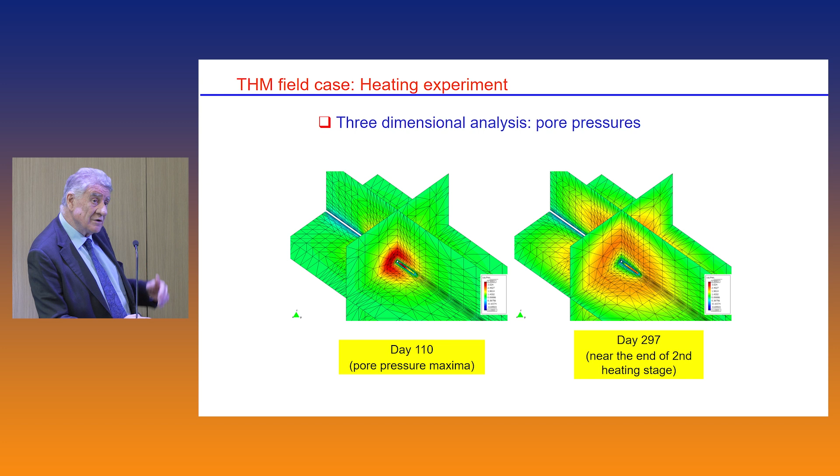These are some results. This is the pore pressure contours. I'm not showing temperature, which is not very interesting. The contours of pore pressures around the borehole, but as time goes on, you can see this maximum pore pressure, because of this dissipation, moves away from the borehole.

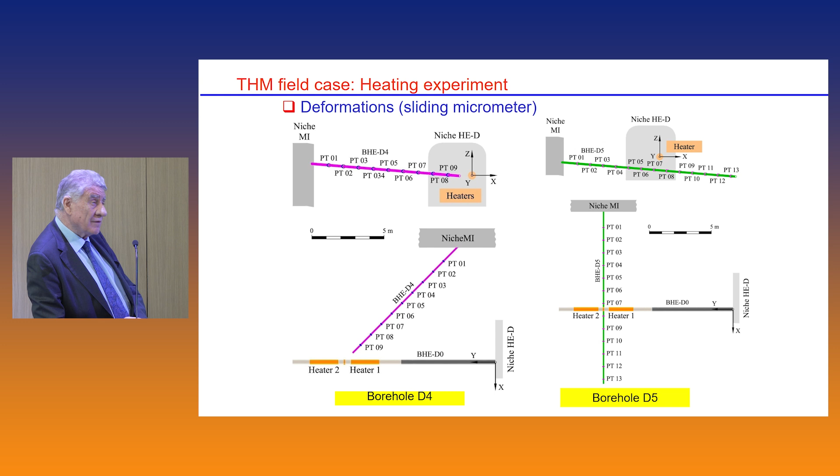We can look at deformations. There were two boreholes with the sliding micrometers, and we're just going to look at this one, which was going through the central part of the heater, below, as you can see here. This is the heater, below.

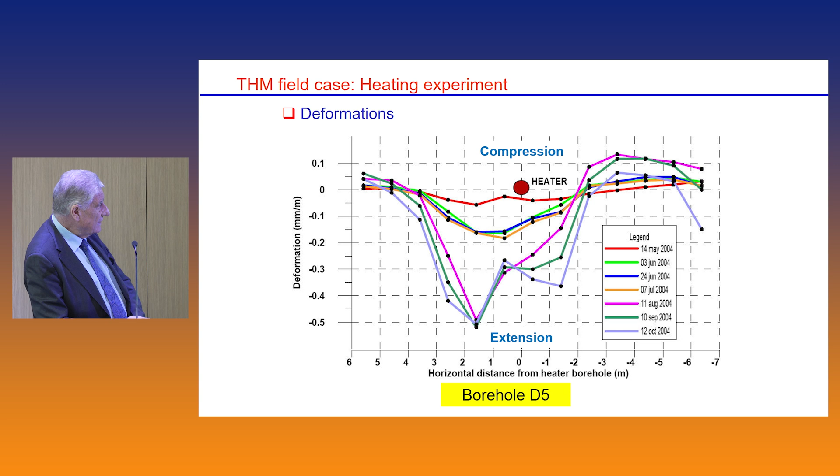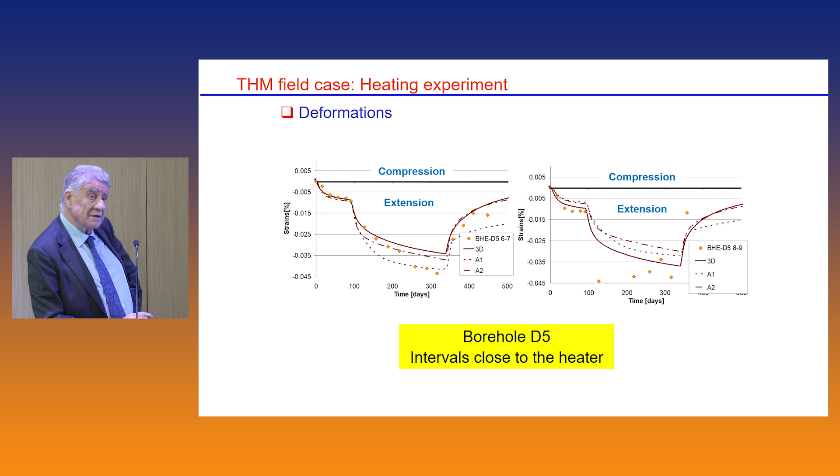These are observations at different times, and we can see that here we have extension close to the heater, partially compensated by compression away from the heater, and we can see that the comparison with the experimental observations, which are these orange quadrangles, is actually again picked up throughout by the analysis. The values are very small. The deformation is not large, so it's probably in practice not very important, but it's nice to find that you get that both close to the heater and away from the heater, there is some compression followed by extension.

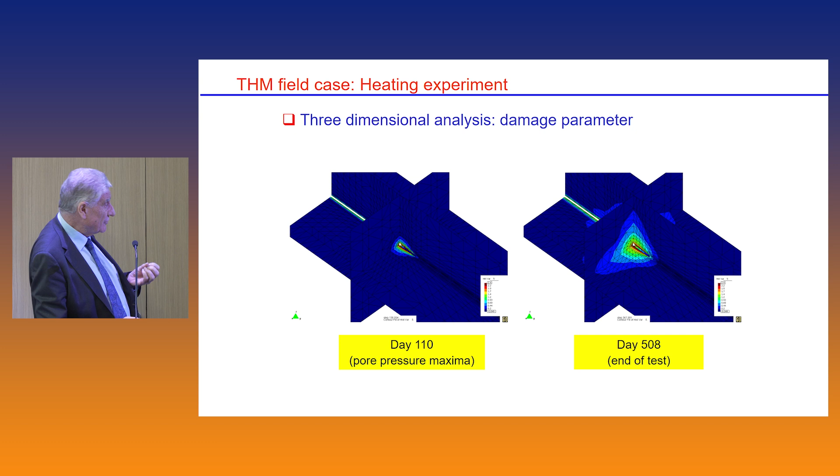We also, well, I didn't have time to talk about the constitutive model, but there was a damage component, so we could get contours of damage. And we tried to see whether that was realistic.

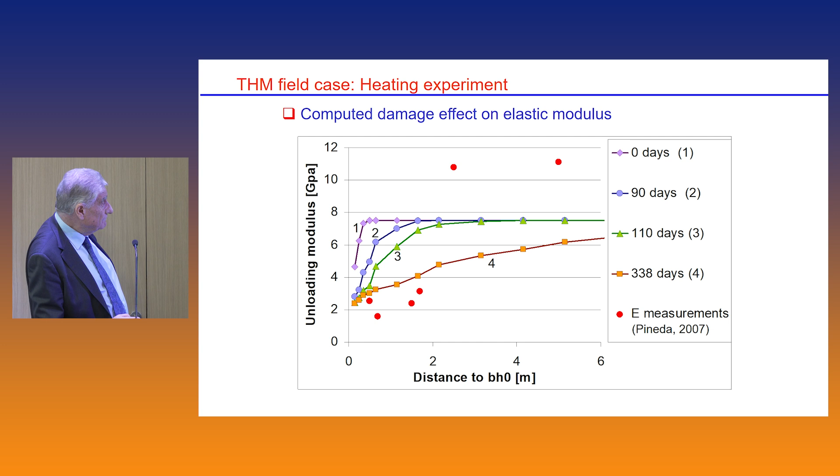Here we have the distribution of damage at different times. What we did was get samples at different distances from the heating borehole, and these are the unloading modulus measured in the lab from those samples. These are the predictions. We can see that there seems to be some damage close to the heater, but if anything, we are underestimating that damage.

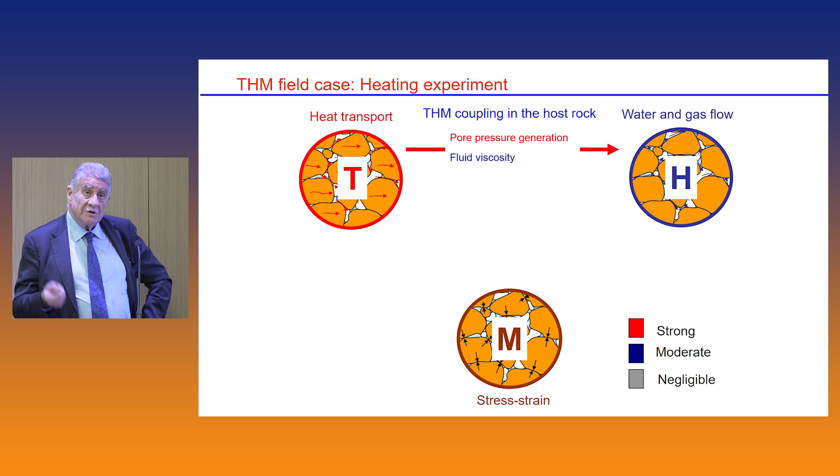One of the advantages of using numerical analysis is that you can look in detail at the results. So you can, for instance, look at the couplings and see whether they are strong, moderate, or negligible. If we go from thermal to hydraulic, due to this pore pressure generation, there is a strong coupling. Also some more moderate coupling due to the changes in fluid viscosity.

From hydraulic to mechanics, obviously there are changes in effective stress, so there is a mechanical effect. But it's moderate because these materials are stiff and they don't deform very much. And then, because they don't deform, the thermal conductivity is more or less constant, and therefore the coupling from mechanical to thermal is actually negligible.

If we do this same road in the opposite direction, obviously there is strong coupling from the temperature to the thermal expansion of the material, more moderate from mechanical to hydraulic through the variation of permeability with plastic strains or with damage in this case, and again from hydraulic to thermal, because heat convection is negligible, there is no change in thermal conductivity, so that coupling is negligible.

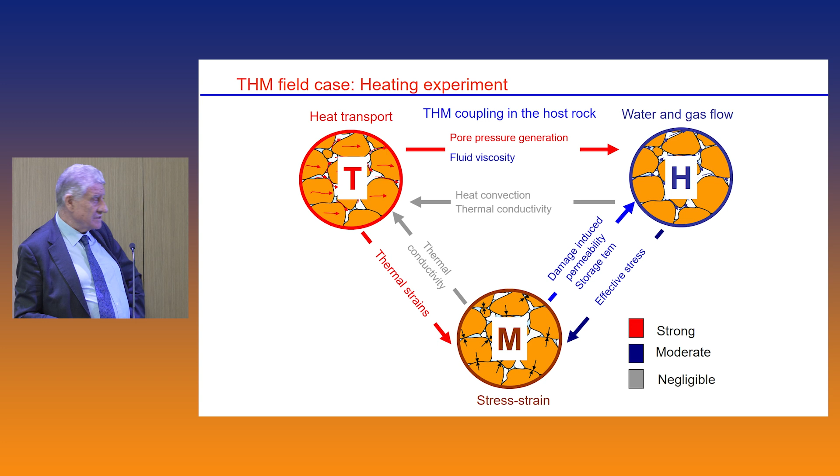Okay, so let me summarize this last part. Argillaceous rock and soil subject to an increase of temperature develop significant water pressures, mainly due to this differential thermal expansion, and this may have practical consequences.

The performance of that HED test in Mont Terri, the one I was describing in some detail, confirms that large pore pressures do actually materialize, and they may cause damage. The coupled formulation together with the constitutive model seem to be able to capture reasonably well the main features observed in the field. And as a consequence, we can get a better understanding by classifying, for instance, the different degrees of coupling within the different components of the problem.

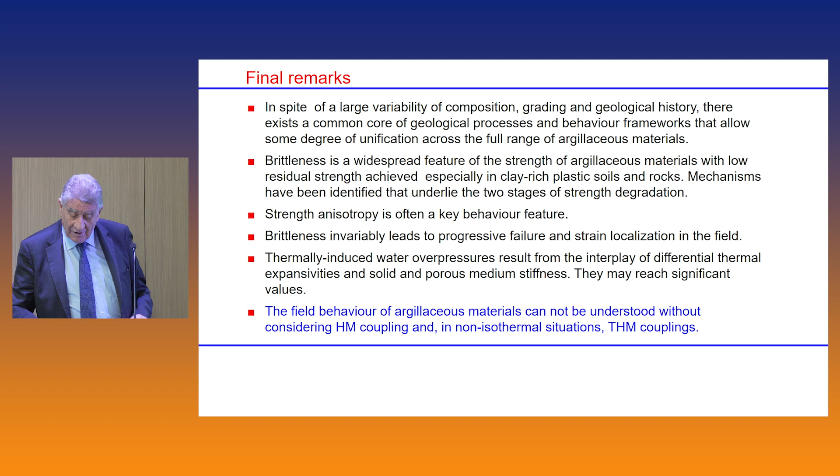So I'm going to finish with some final remarks, which is a bit of a summary. These materials have a large variability of composition, grading, and geological history, but there seems to be a common core in which we can get some degree of unification across the range of materials we have considered. That's always very satisfying because it helps you organize your knowledge in a more efficient way.

One widespread feature is brittleness, and if you have a lot of clay fraction, you end up with a very low residual strength. And we have identified the mechanisms associated with the two stages of brittleness that we have observed.

Also, strength anisotropy has important consequences in practice that you have to take into account. And brittleness, this is important, always leads to progressive failure and strain localization. We have seen examples of both.

Also, water overpressures result from temperature increases, and they come from the interplay of the differential thermal expansivities and the stiffness of the associated material. And again, these overpressures reach very significant values.

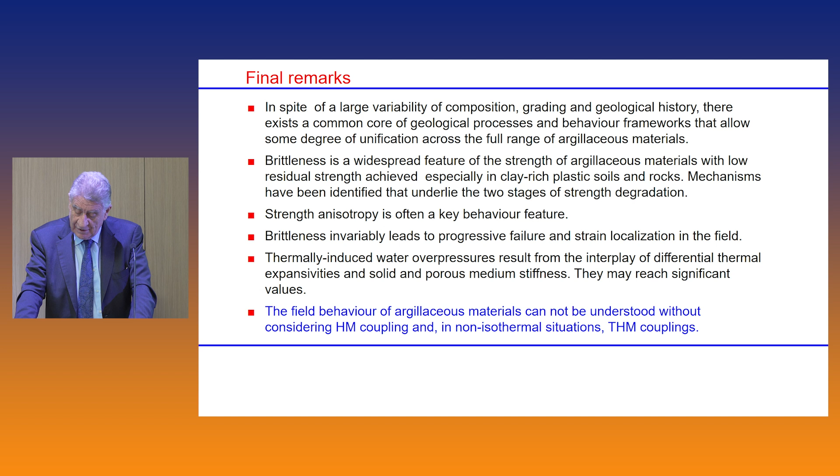So if I have to summarize the talk in a final sentence, I say that the field behavior of argillaceous materials cannot be understood without considering hydromechanical coupling, and if you have a non-isothermal situation, thermo-hydromechanical coupling. Merci beaucoup pour votre attention.